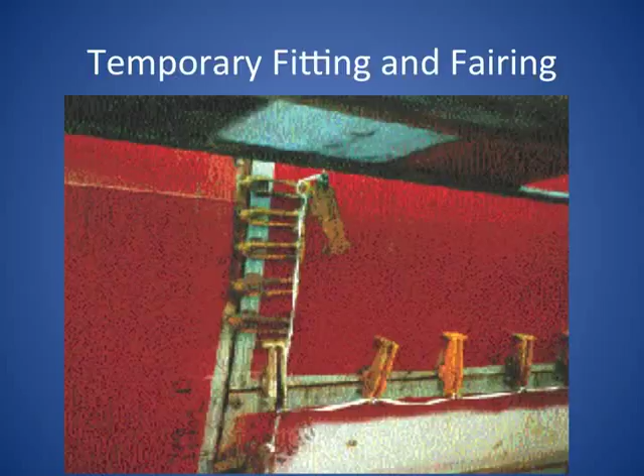So anyway, these are stud welded, and then they have bolts to try to hold the plate intact. The problem is, anytime you do any temporary welds, you have to break those welds off. Often when you break those welds off, you damage the underlying plate. So you're into the cost of welding these attachments and then also making the repairs after they're done. So that's sort of my aim, how to avoid that.

A couple other things you like to avoid: if you're using adhesives, you're not doing hot work. You don't have to gas free. You can effect temporary repairs, sometimes fairly quickly at sea. And you can avoid galvanic corrosion because it's somewhat insulated, or at least galvanically insulated.

The thing that came to mind when I was thinking of the hot work thing was the French liner Normandie. In the late 30s, the owners decided to park the Normandie in New York because things were getting a little hot in Europe. When the U.S. got into World War II, they took over the Normandie and decided to make her into a troop ship. They were doing some welding in the after part of the ship to make some modifications.

A life jacket locker caught fire. Basically, the ship started to burn fiercely. The New York Fire Department poured water on it until it capsized. And that's what you see in the lower right. Sat there for a while. They figured they couldn't salvage it. They basically just scrapped it

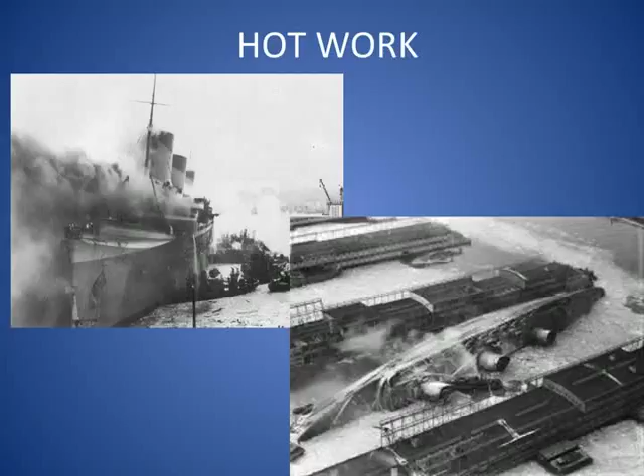from hot work. Of course, I doubt they had the adhesives then that we have now. But hot work can be a bad thing. You can avoid that somewhat with adhesives.

We just talked about the lap shear thing. That's the best way to load adhesives, and that's a diagram that shows that test. Pure tension, pure compression, and the weakness of adhesives is in peel. But towards the end, we'll see where that can actually be an advantage to us.

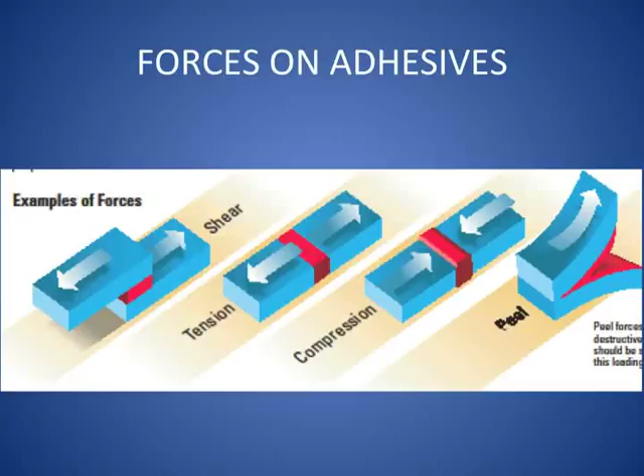Failure in adhesives: you either fail the joint in the adhesive, which is called a cohesive failure, between the adhesive and the substrate you're trying to bond together, called an adhesion failure, or if you have a really strong adhesive and a weak substrate, such as an epoxy and cheap E-glass laminate, it's quite likely you're going to fail the substrate or the underlying material.

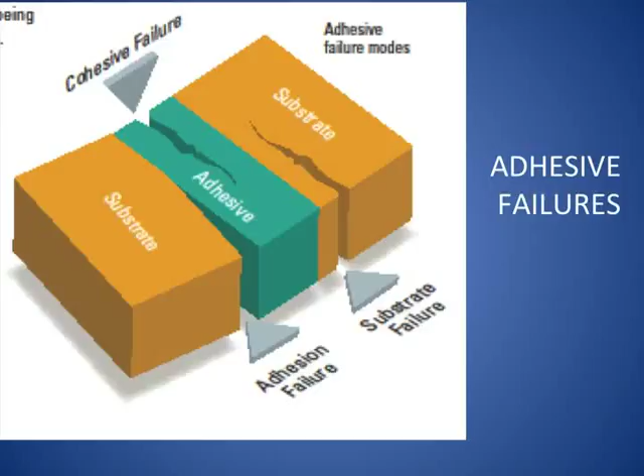In steel shipbuilding, which is most common amongst these SNAME get-togethers, we're not usually failing the substrate with adhesives. But I've got more of a composites background, so it's sort of a toss-up between what your adhesive is and what your materials are as to what's going to fail when you start to pull things apart.

An interesting read on the adhesives when I was searching around was Click Bond. I think they're one of the partners in John Walk's project at Ingalls. This is a series of shots I took from Click Bond's website, but I thought it was very interesting and nicely explained. They do a nice set of short videos, so I used those, and I was allowed to do that. I got permission.

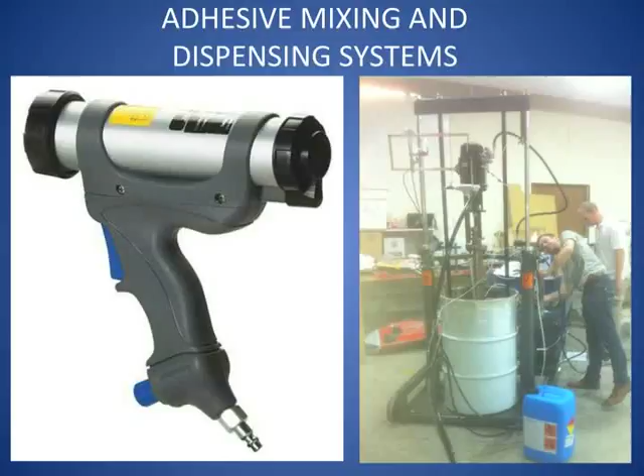You get into bigger applications, you can pump it out of a drum. This is a picture of a big machine that pumps it out of a 55-gallon drum. If you're into big applications, the adhesive that comes in a drum is going to be a lot less expensive than little bits of adhesive that come in these little cartridges. You've got to do a lot of pumping to pump a lot of adhesive out of one of those. So again, it depends on the application and what you're using.

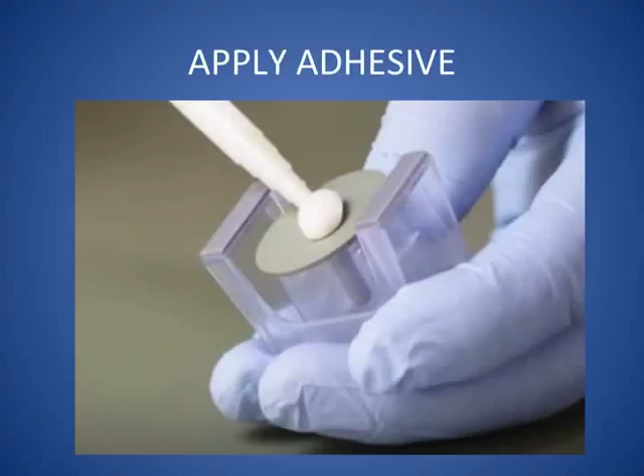So in the nice ClickBond series of videos, they'll show you putting just the right amount of adhesive on their little attachment there. The ClickBond, I think their patented method is this little plastic enclosure that when you apply that part, you push the center of it down, which pushes the stud right there. See the adhesive starting to spread out below that. The nice thing about it, it gives the right amount of pressure. So they have this QC system built into their patented application.

And when the center of that plastic part clicks, then you leave it there. Actually, on this particular application, they have peel and stick tape right there, so it holds that item in place until the adhesive cures. Sort of a nice series of events. It's not quite totally foolproof, but it's pretty interesting. So then when you're all done, you have this nice fillet, nice even adhesive all around it if you put just the right amount on there.

The reason I put the question mark on the finish there is part of this is the surface prep. You can see where what looks like a primer, a weldable primer, has been sanded and ground away so that you have a clean surface to bond to. So you get a better bond. You get a better bond to a sanded steel surface than you do to paint. If you're using a lower loading requirement, you could just stick it to the paint. Then the strength of the adhesive is most likely the strength of the paint. That might be all you need. Here you still have to repaint.

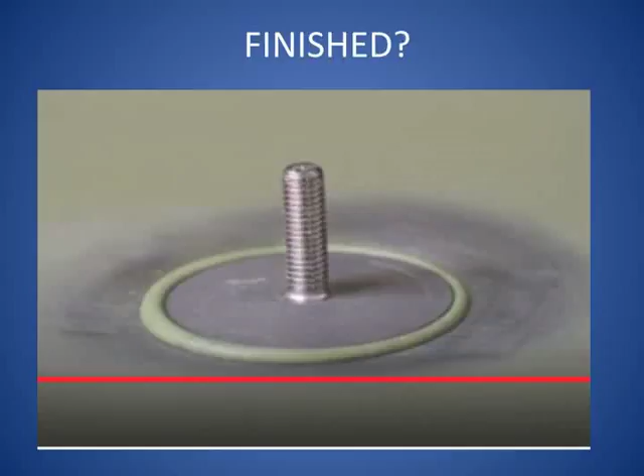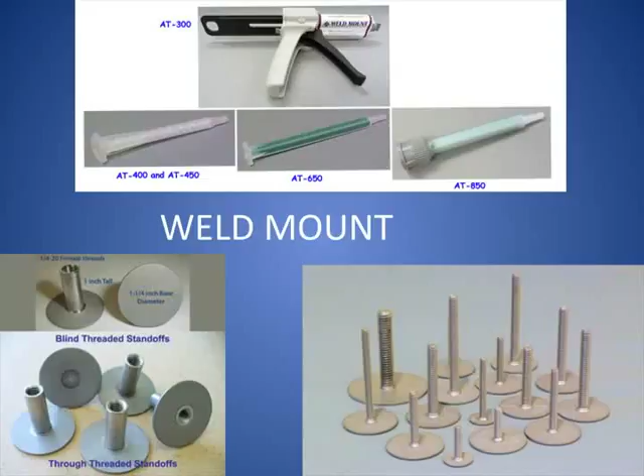Didn't want to give ClickBond all the credit. There are some other companies out there that have this. We're supposed to be non-commercial, so I try to make everybody happy. A couple of other companies are Weld Mount, and you go on the web, get a bunch of pictures of the things they do. And another company, Rotolock, seem to be the other two competitors to ClickBond.

They have some slightly different arrangements and styles of gizmos to attach, but all of these are set up to be bonded to other parts of steel ships or aluminum ships and somewhat eliminate the need for either stud welding or other welding, which, like we looked at, involves hot work or gas freeing and usually paint touch-up.

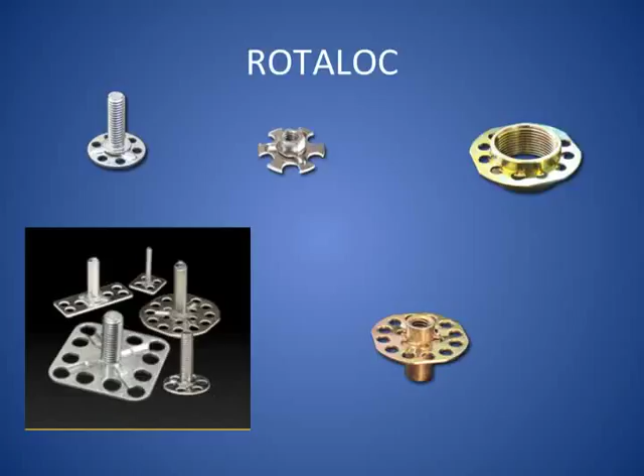Wanted to take a little sidetrack here. We talk about adhesives and we think glue's pretty weak stuff. But the Swedes didn't think so. They built a 72-meter corvette. And if it's all composite, it's basically all glued together. That's just a bunch of glue and fabric stuck together. Stick a couple of gas turbines and a gun on it. It goes 40 knots, and they've been doing a really good job. There's a whole other story behind those. It's not as simple as it sounds, but they did a nice job on these boats.

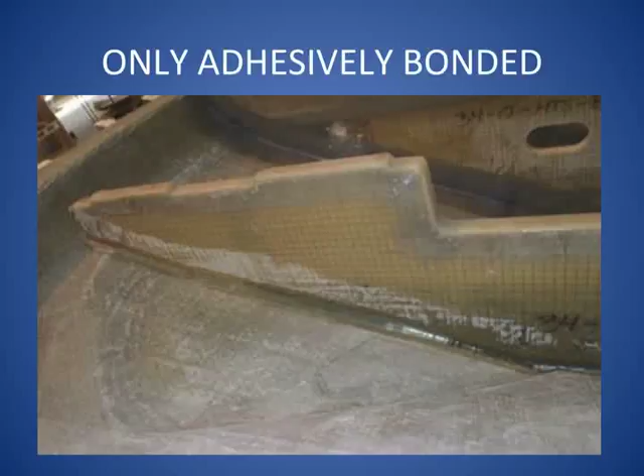But that whole structure is bonded together. There's no taping, there's no welding, no studs. They just had a bunch of plates. They molded the hull and all the framing, and this is one of the transverse framing members. They just have big fillets glued in there. They didn't even have taping joints. They just glued it together. Of course, they let the glue cure first, and then they tossed it off the ramp, and that was pretty good.

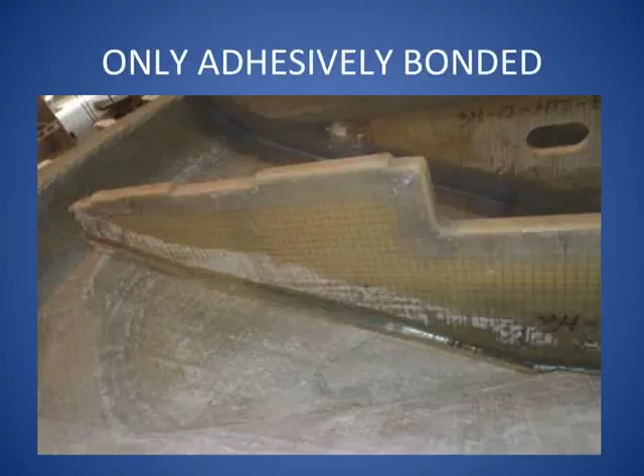So if we go through our range, the adhesive used on that was not the super high strength stuff. You'd think, my gosh, with those kind of loads, you'd use the high strength stuff. For them, the most efficient one was sort of a medium strength, high elongation, tough urethane acrylate, the kind you could pump out of a drum. So if you're building a series of boats, you could pump your adhesive out of a drum and make those nice fillets. And I've actually designed a few boats that are designed to be put together just by being glued together.

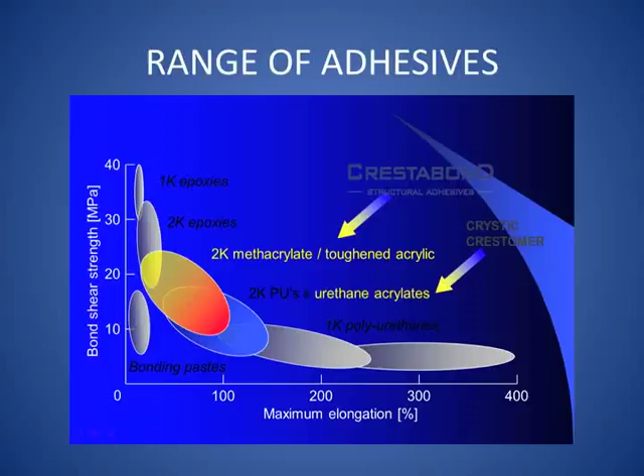A lot of the historically known way of sticking fiberglass boats together is to put a bunch of fiberglass tapes in everywhere. And that can be a little bit time consuming, not always necessary. So if we get back to our shipbuilding problem, we have all these temporary attachments. If we're trying to pull chunks of a ship, in this case a part of a deck house, I think, together, we have all these temporary lugs that are welded on.

If you've ever been involved in this, when you're all done welding up this nice butt joint here, then you have to break all those lugs off. Frequently you break them off and you destroy some of the underlying plate. So then you're into weld repairs of the plate. A lot of effort into putting them on, taking them off, and doing repairs.

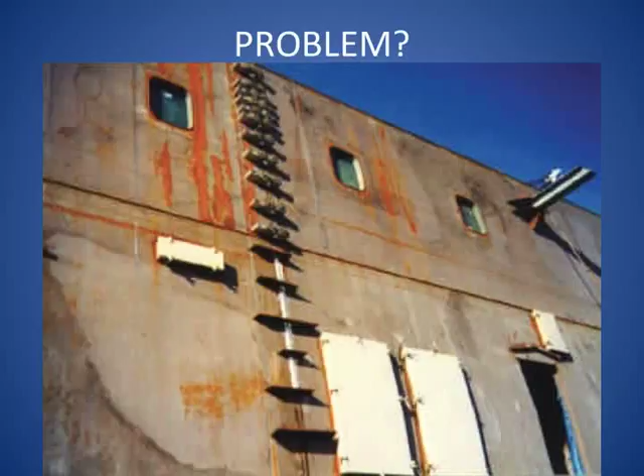So the idea is if we glue it on and we load it properly. Remember we talked about peel being a bad thing. So if we glue something like a pad eye on, if we're going to take a strain on a chunk of the ship to pull another chunk of the ship into it, if we load the pad eye such that it's loaded in shear, then we get more strength out of an adhesively bonded pad eye than we can out of a welded pad eye.

If you take a high strength epoxy with a safety factor of 4, you can pull about 180 tons with a pad eye that's glued on. If I put a 1/4 inch fillet weld all around the perimeter and use the same safety factor of 4, I can get about 45 tons. So I can get more strength out of a glue joint than a welded joint. Of course, I could use bigger welds, but maybe I could use more glue too. But when I go to pull that off, I can start at the corner and pull the thing off.

And actually a weakness of adhesives that John addressed is some of the environmental conditions. With real high temperature, say in a fire or in a high temperature space like a boiler room, you may exceed the heat deflection temperature of the adhesive and lose strength. But that can be used as an advantage for a temporary attachment in shipbuilding: just heat it up and peel it off.

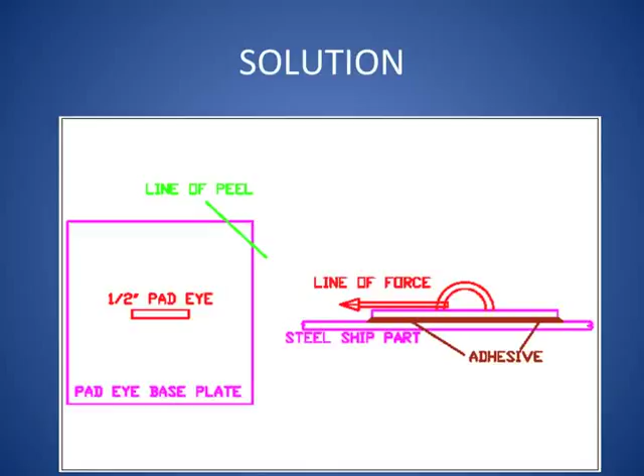I thought of something else. The clip-on thing that you showed, that little plastic thing, obviously that kind of controls the bond line thickness. Yeah, that's the other nice thing about it. Right. And then I'm comparing it to the large-scale application you just had up there of the big pad eye. The big pad eye, yeah. And larger things that aren't small uniform pieces like this. Have you seen a good practice to control the bond line thickness and to ensure you have 100% coverage on the surface as well?

I've seen it, say, in the lab or with people that really know what they're doing, but usually what I see in the field is overuse of adhesives, where they put on way too much. And sometimes with adhesives, it's bad. You get them too thick, like a methacrylate, like a Plexus or a Weld-On methacrylate, they'll boil. They get hot. Or some adhesives will actually crack. You get them too thick, they'll self-crack from the exotherm in the process of curing. So it's good to get the thickness right.

And it's interesting on the Click Bond thing that they've got this little, you put the right amount of pressure, it squeezes it down. It seems pretty good, but then in actual practice, in a shipbuilding atmosphere, you could have a temperature swing of somewhere around 45 degrees to 95 degrees. That same adhesive is going to have a much different viscosity at those different temperatures, so it's going to squeeze out differently. In this application, it squeezes it down and stops at about the right thickness, so it somewhat takes care of that. Even with different viscosities, it shouldn't vary too much.